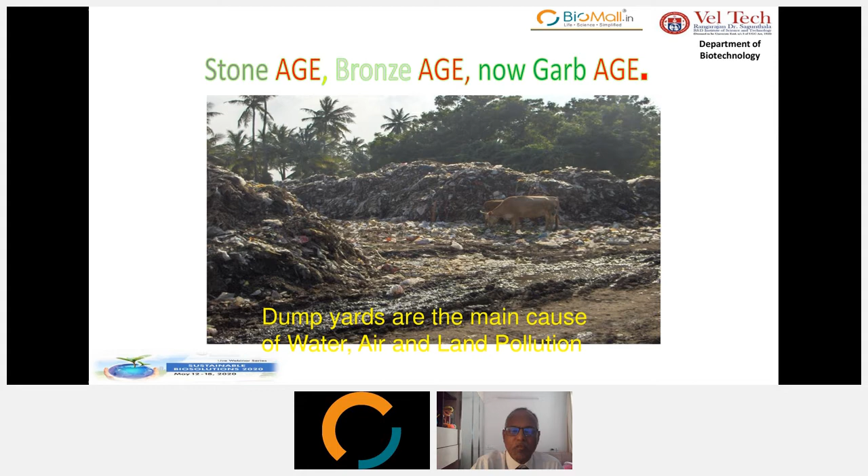We have gone through the Stone Age, Bronze Age, and now we are going through the garbage age. So dump yards are the main cause of water, air, and land pollution. These are waste generators, and the types of waste that are accumulated every day, and how that can be dealt with technologically, is what this slide is all about.

So we have biodegradable waste and non-biodegradable waste. Today's presentation is basically on how to handle the biodegradable waste, though there are solutions for non-biodegradable waste too. In biodegradable waste, we have the fast degradable ones - that's food waste and animal waste - which we are using biomethanation technology for.

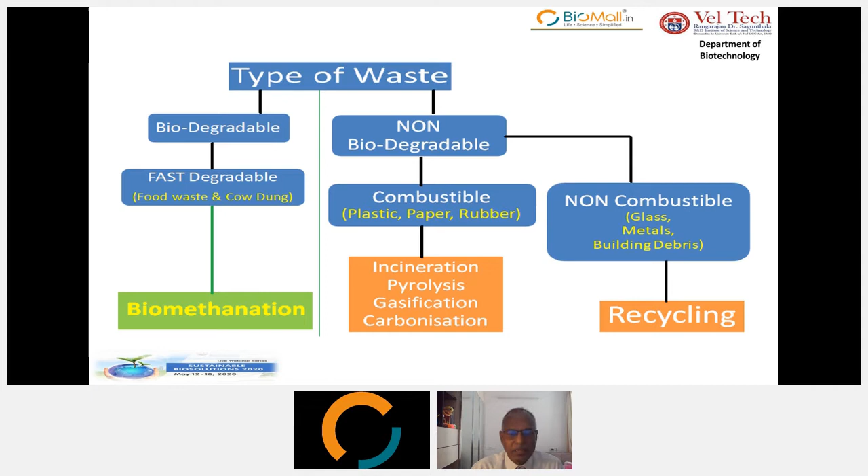So this is the solid waste generated per capita per day in any community, about 0.40 kgs. And sewage waste generated per capita is about 150 liters.

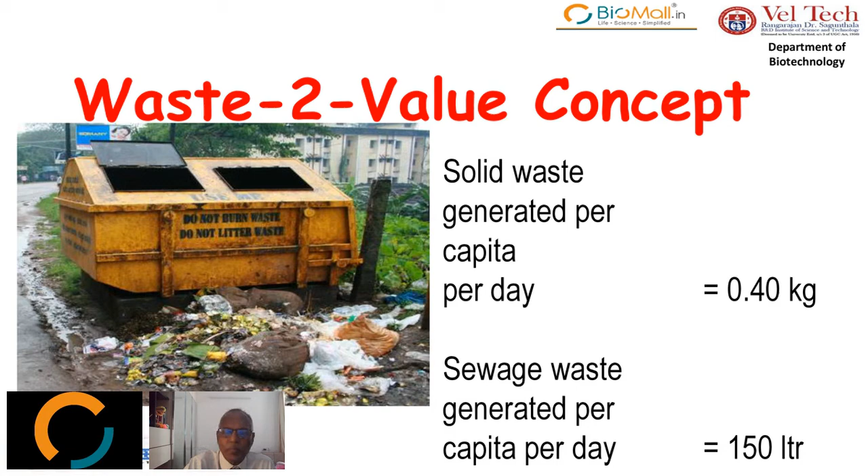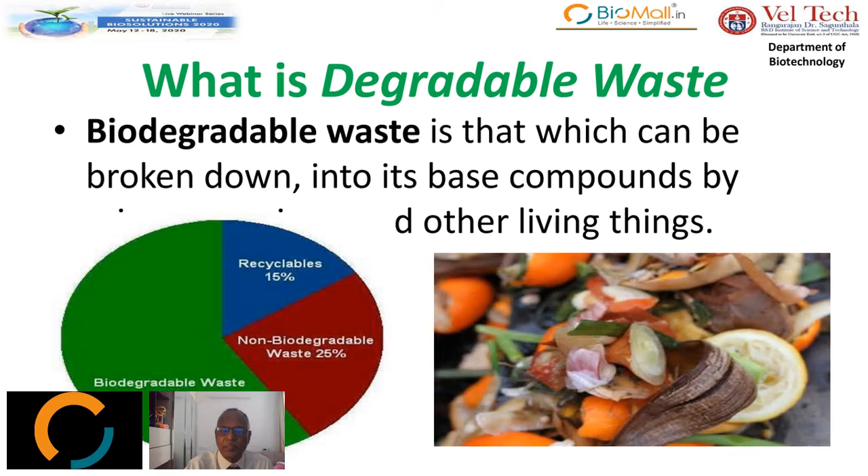Biodegradable waste is that which can be broken down into its base compound by other living things. We have explained this in brief, so now let's look at the details.

Food waste includes vegetable cut waste like peels, rotten leftovers of cooked food, and decayed foods.

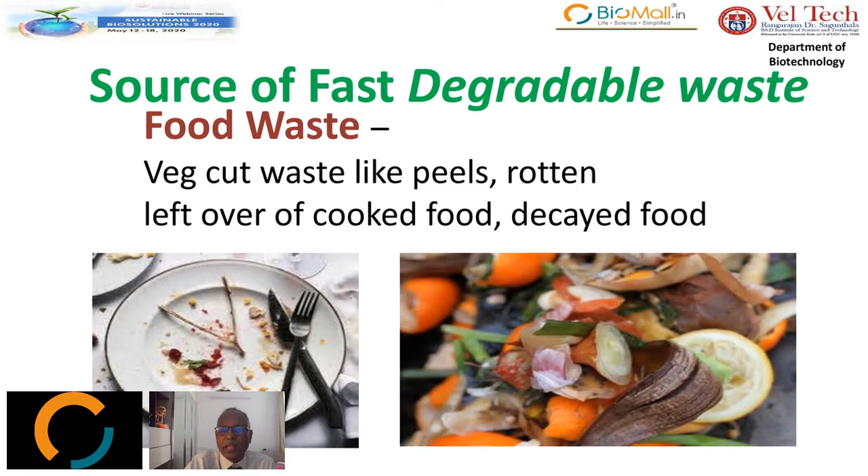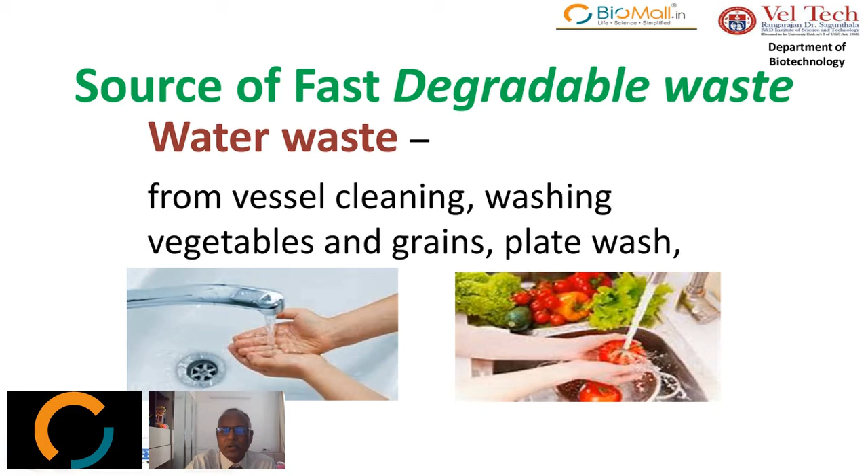Water waste comes from vessel cleaning, washing vegetables and grains, and plate wash. The only thing we have to ensure is that we don't use chemical detergents to clean up these things.

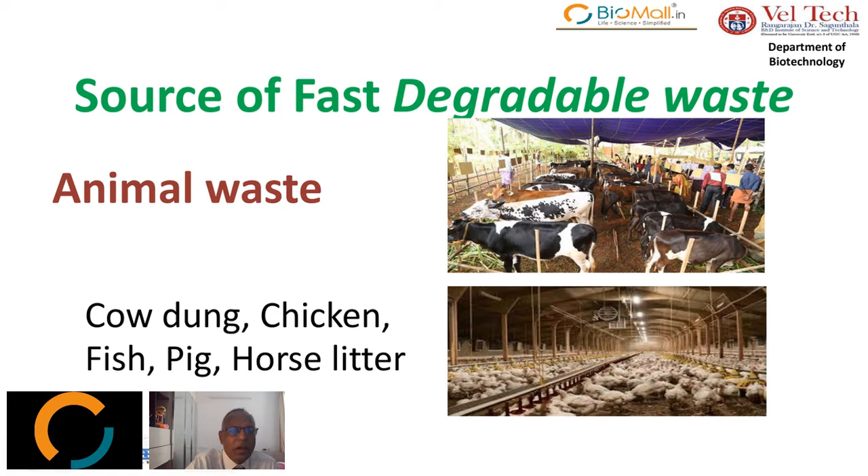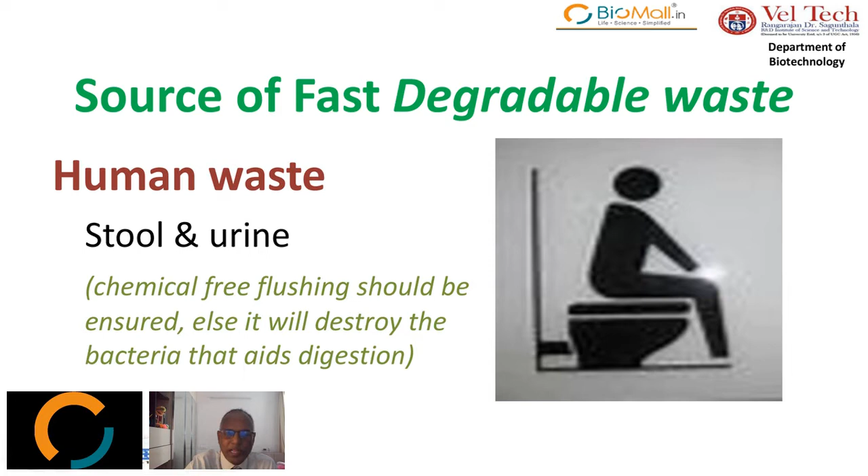And human waste, stool and urine. Chemical-free flushing should be ensured, else it will destroy the bacteria that aids in the digestion.

Source of slow degradable waste is from grass, garden trims, dry leaves, sawdust, rice husk, stalk, fronts, etc.

If you look at the crops that we produce in India or anywhere in the world, they can be classified as food products and commercial products. Food products are those we consume for daily living, and the commercial ones are used for our dressing and other things.

So for any of these things, the usable portion is only between 20 to 30%, and the balance is waste. What do we do with them? We either mulch them and put it back into the ground, which over time gets decayed and is also a cause of pollution, or we burn them up.

When we put them into the land, the gas that evolves is methane, and it is 20 times more dangerous than carbon dioxide.

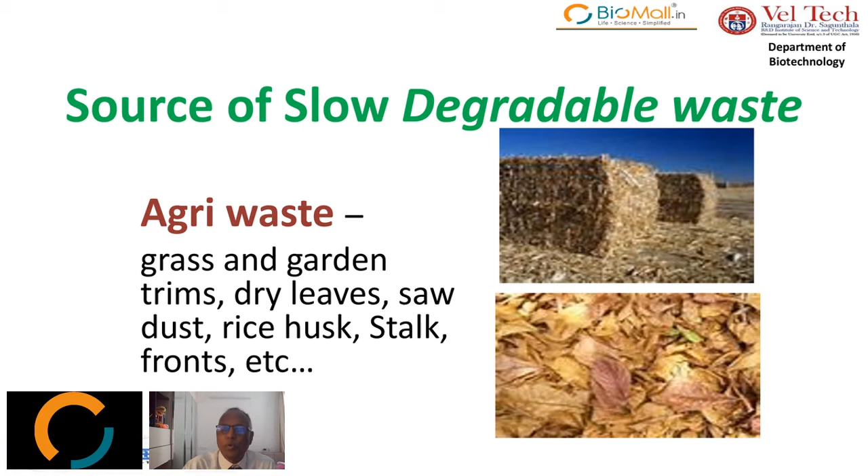Waste paper should be shredded and mixed with cow dung to be made into a homogeneous product.

Municipal solid waste is the most important thing which has got a solution. Only thing is we need a mindset and an attitudinal change to see that these are converted into a profitable gas. Today, people think this is a resource by itself and should be a revenue generating model. It is not so. Actually, there should be money spent on this to see that it is profitably used.

Most people talk of ROI in the waste management system. That's a misnomer. What we have to think about is only waste management and how to profitably use that in industries.

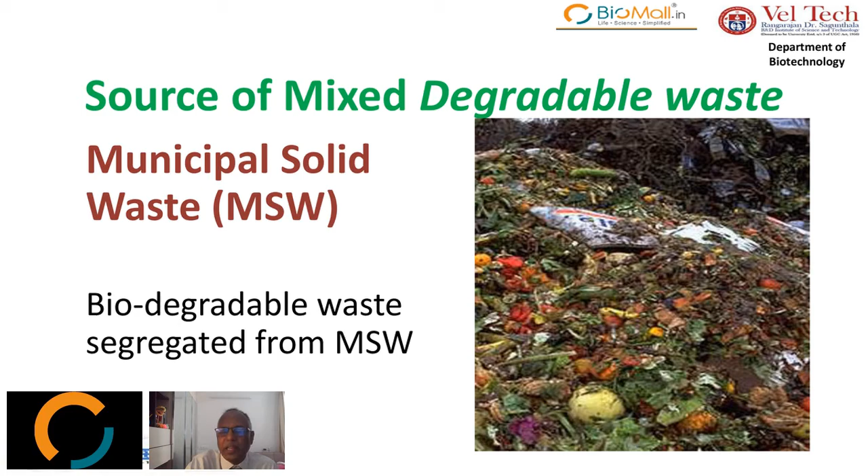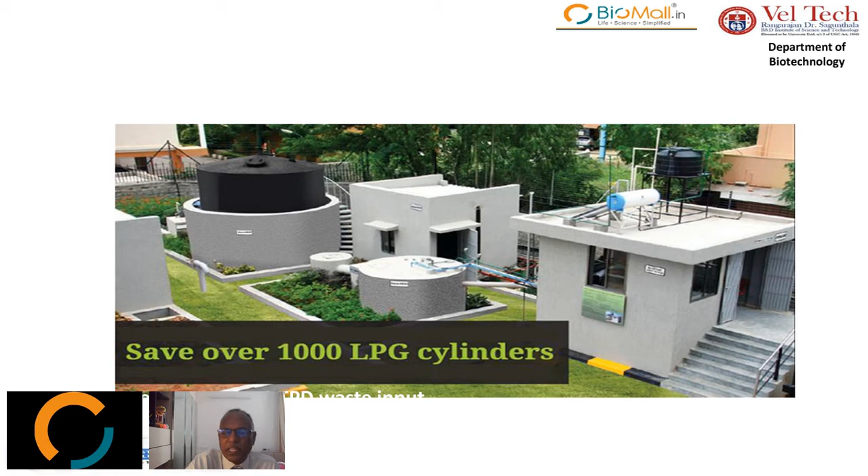This is one of our projects, a 1 ton project where 1 ton of biodegradable waste is handled, and this is saving around 1,000 LPG cylinders a year. We will give this detail in the coming slides.

This is the flow chart where the waste is put into a collection tank, then goes into a pre-digester where the product is homogenized and aerobic digestion takes place, and then it goes into an anaerobic digester. From there it is retained for about 20 to 25 days depending on the mix, and then what comes out is a gas which can be stored and used, and liquid manure which can also be converted into solid manure, which is very highly nutrient rich.

The gas can be used for either power or can be stored in cylinders, transported and used as fuel, or directly used as fuel. When we have to fill it in cylinders, we have to do further processing of cleaning up the gas.

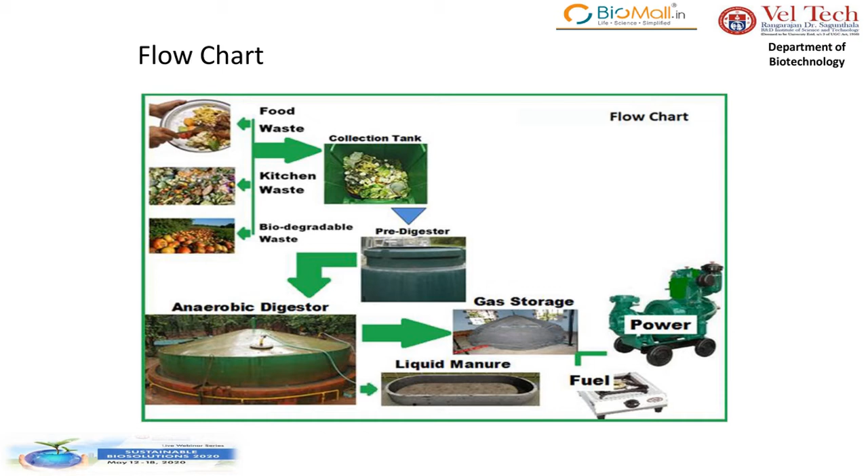This is the gas balloon which we normally use, and the sizes vary depending upon the size of the plant.

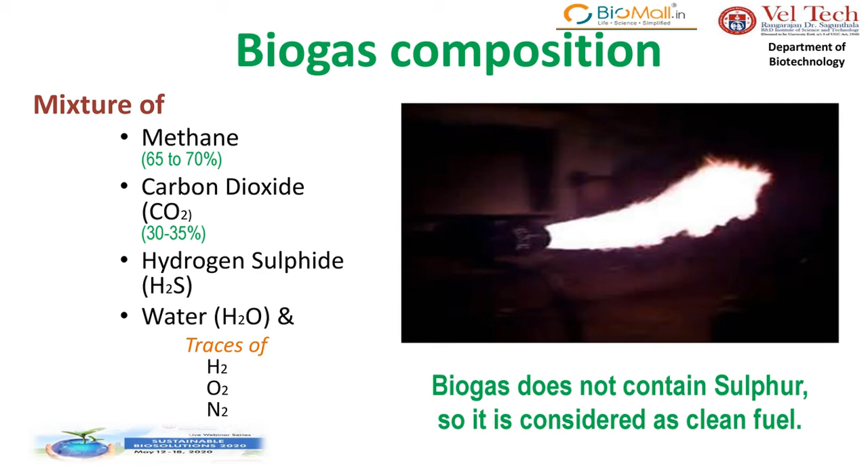So biogas composition is what we are seeing here. It's mainly methane, 65 to 70%, carbon dioxide 30 to 35%, hydrogen sulfide, and water and traces. Biogas does not contain sulfur, so it is considered a clean fuel.

The gas can be cleaned and filled in cylinders depending upon the use. It can be directly used up to 100 meters if the plant is set up within the industry. But in most places, when the volumes increase, it is not really possible to consume the entire thing.

So what we do is we fill it up in cylinders. There are different varieties of cylinders, but the standard ones are 12.5 kgs, and four cylinders become a cascade, which are easy to transport.

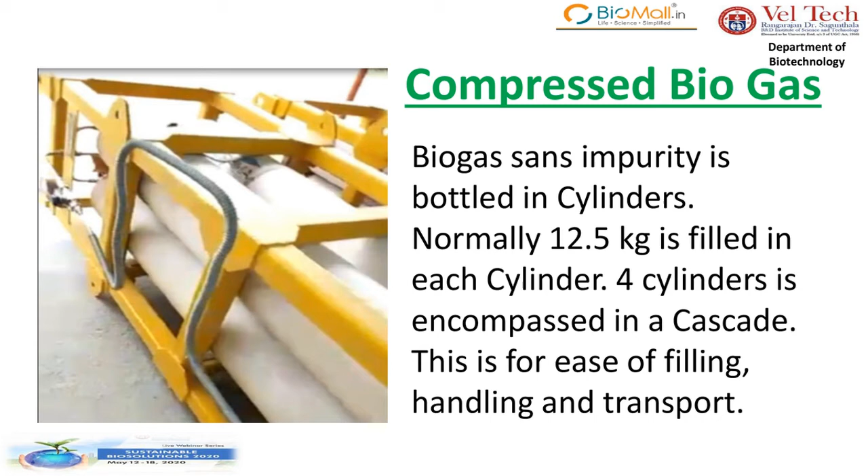So this gas can be put to different applications. When used at site, we use a burner—it's a lean gas, so we have bigger holes that are used in the burning, and it can be used in boilers also.

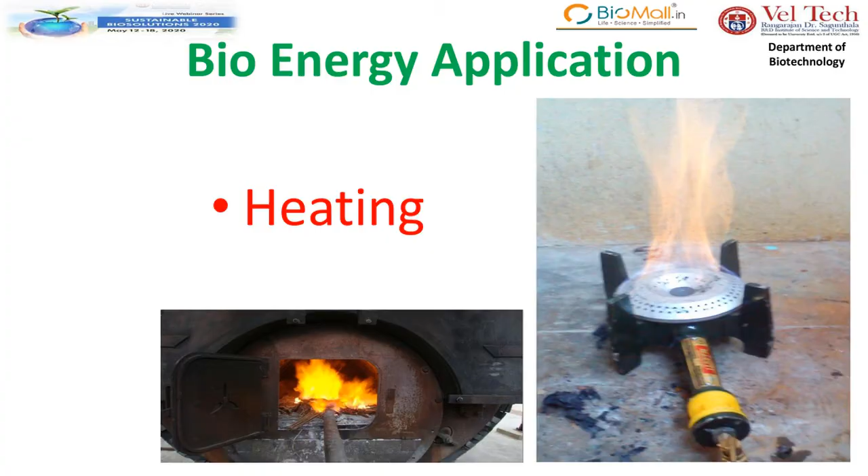It can be used for cooking. The different uses is what I'm explaining. It can be used for drying. We normally use this in tea industries and other drying applications, process drying.

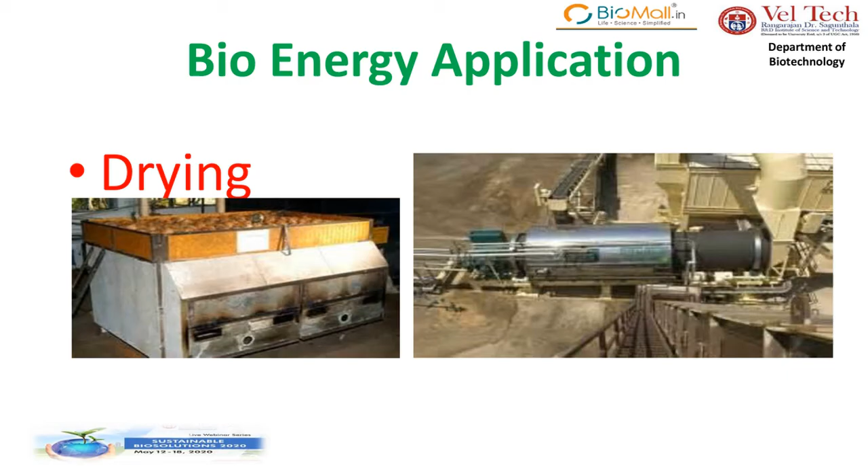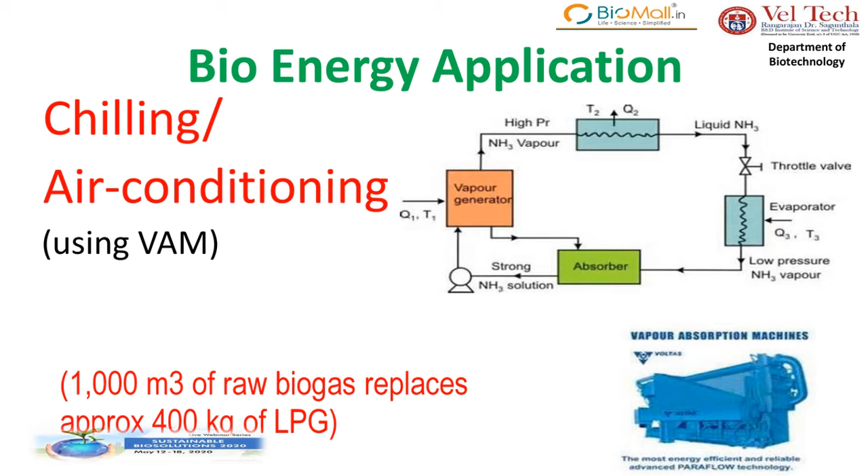In air conditioning, using a VAM, technologies have evolved where we have the latest vapor absorption machines also, where steam can be converted into chilling requirements.

Gas engines, clean and green power. 1,000 cubic meters of biogas can power a 125 kVA genset for 8 hours. So that's the type of waste to value proposition that we are talking about from waste.

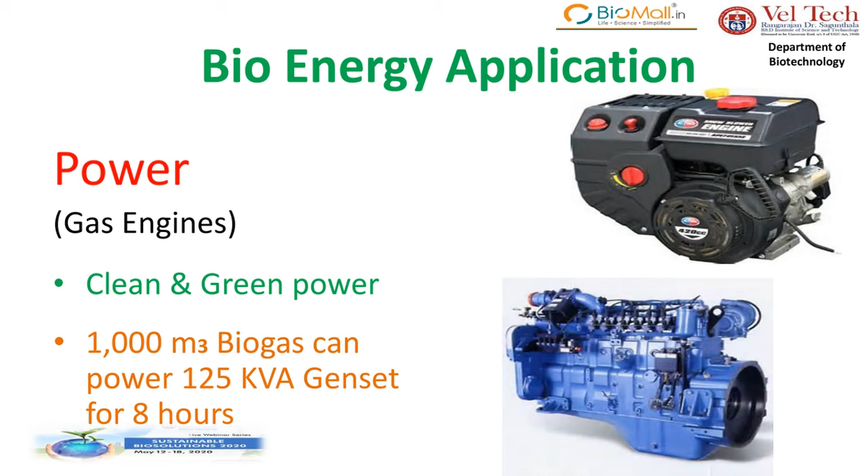This was used in World War II in automobiles for mobility also. So the application of this waste to energy is there in every industry, and every industry is also a waste generator. So liquid and solid waste are generated from these industries, animal industries, chemical industry, paper mills, sugar industry, abattoir, poultry farm, fish market, vegetable market, and gardens.

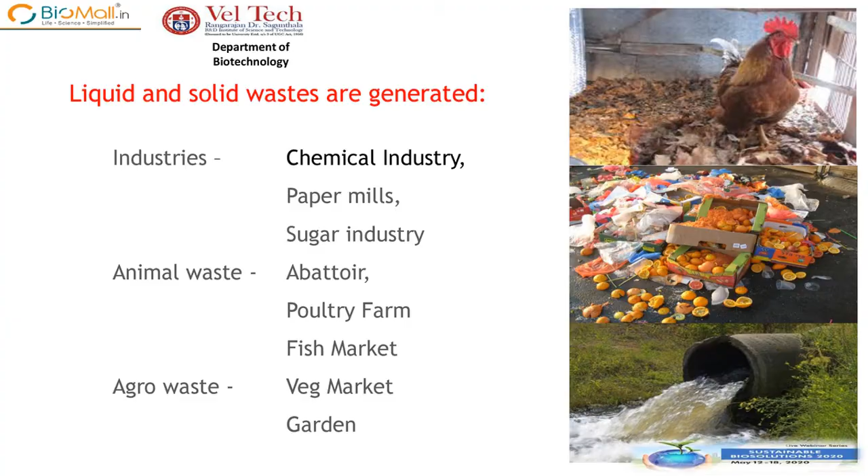A typical saving plan is shown here. I have taken a standard of about 1000 kg of waste processed per day, where we get an equivalent of 48 to 50 kgs, which at today's market price of 65 rupees per kg, there is a daily saving of 3,120 rupees, or an annual saving of 11 lakhs and 38,800 rupees.

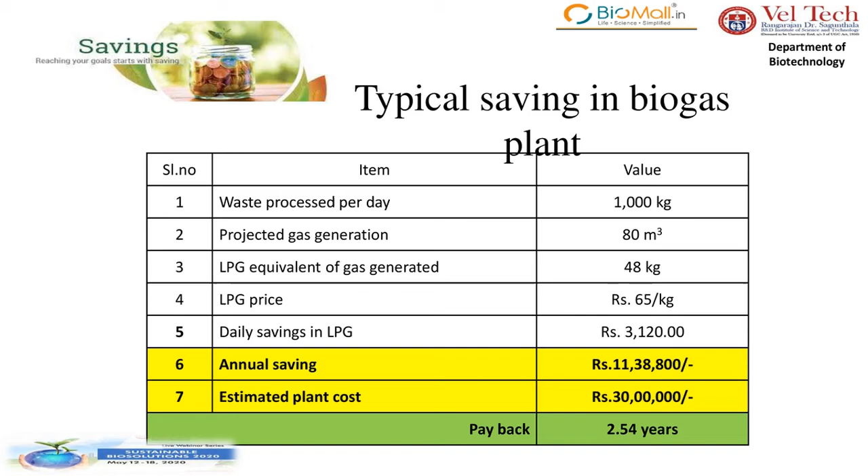Normally, the ROI for this type of renewable energy project is less than 3 years, which can be taken as a reasonable standard for investment, because loans are available, Swachh Bharat funds are there, and clean energy funds are available for industries. Or it can be a parallel industry where high net worth individuals can be requested to invest in the project in collaboration with the industries concerned, and the heat can be used for their process.

The solid byproduct, about 8 to 10% of the input, and liquid byproducts are nutrient rich and can be used for gardening.

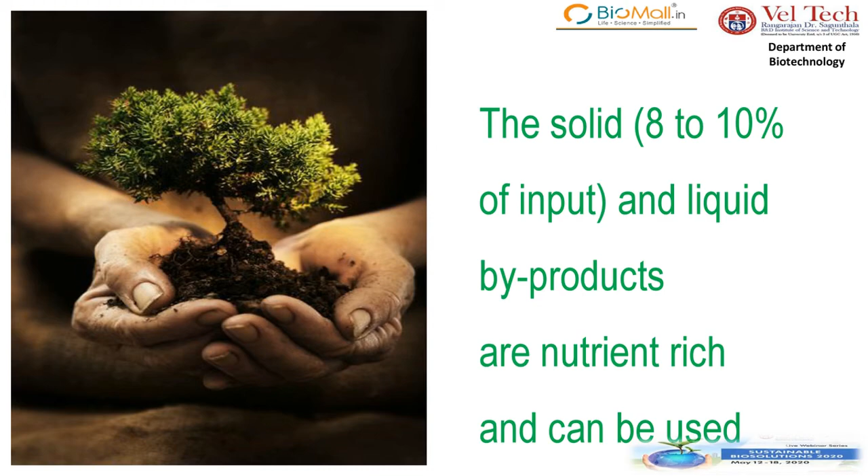We have standard packages available for these biogas plants, which I will show you in future slides, and custom engineered ones for large sizes, smaller ones in HDPE, where we can use it for hotel, canteen, cafeteria, and community kitchen.

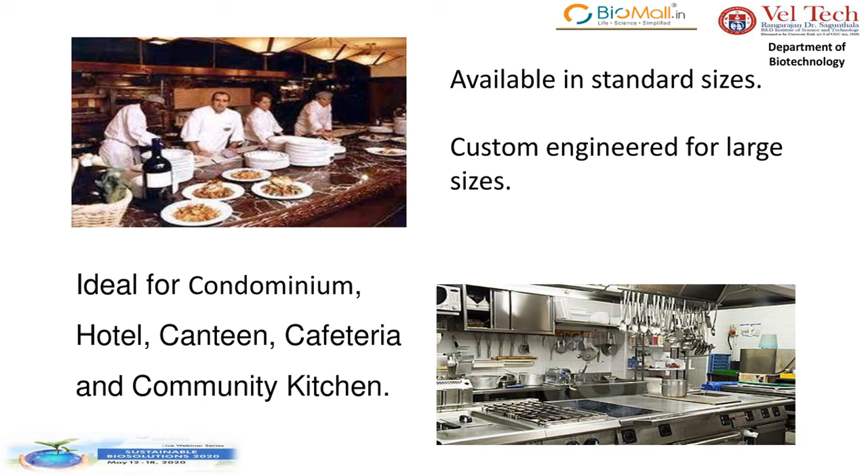These are some of the models that we have created. This is a 500 kg plant in TNPL kitchen, where it is used for their cooking purposes. SSM builders is a community of around 3,000 houses, where they are using this entire thing and taking it to their kitchen.

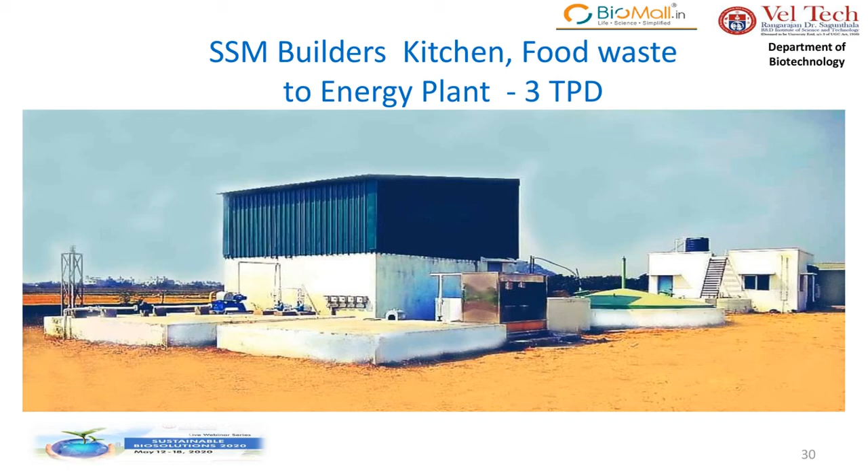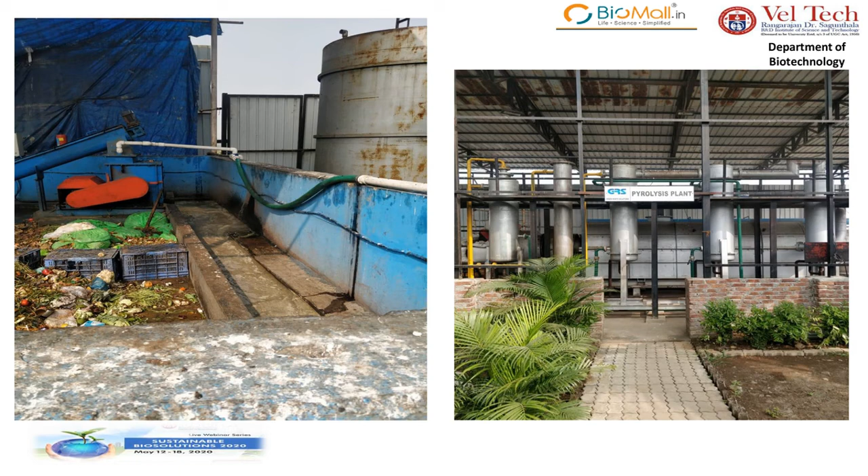Biogas plant set up in Kalyan for Godrej under the CSR project. So this is a view of the plant. I can show you a video of that plant later if time permits.

You can do whatever you want with this plug and play model. And this is very ideal for 100 kg to 1000 kgs. Even multiples of thousands can also be done, but cost-wise, it cannot be justified.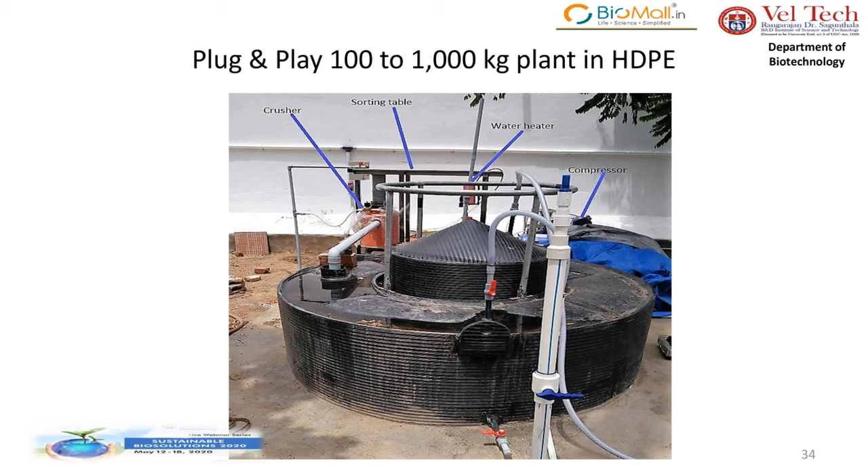So the technology we are employing is BARC technology, Nisarguna twin digester technology, and DRDO's advanced reed biotechnology, and Ecogia of Japan.

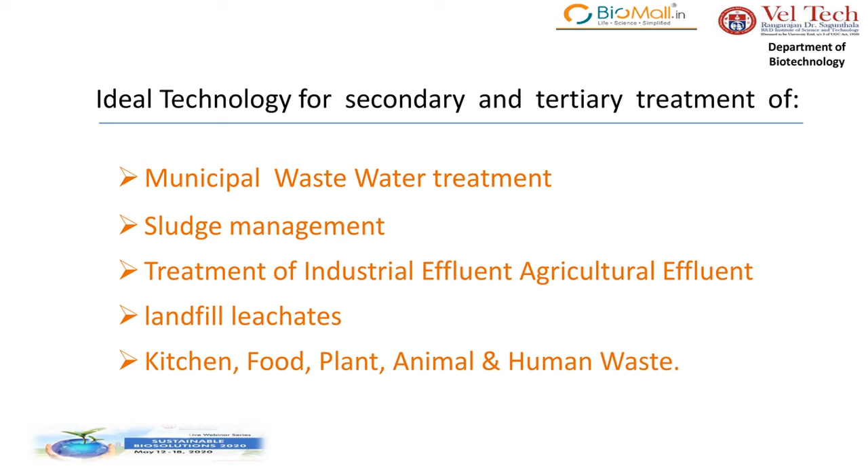So water treatment also is possible using this technology, municipal wastewater treatment. We can use that in the biogas plant also to improve the moisture content and homogenization of the waste, sludge management, treatment of industrial effluent, agricultural effluent, landfill leachate, kitchen, food, plant, animal, and human waste.

So DRDO's biodigester with reed bed technology is accepted for implementation on a national level by Indian Railways, Ministry of Drinking Water and Sanitation, FICCI, and Ganga Action Committee.

So these are the advantages which are coming with this: biodegradable waste processed at source without creating any environmental impact, zero waste concept, transporting and dumping eliminated, 100% foolproof system of waste handling.

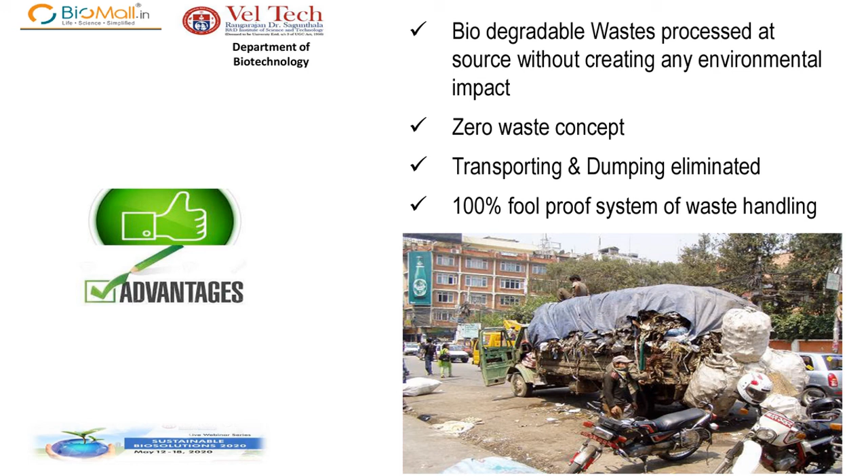The plant can be constructed underground without space wastage, environment friendly since the process does not generate any polluting liquids or gas, simple to operate, almost zero maintenance.

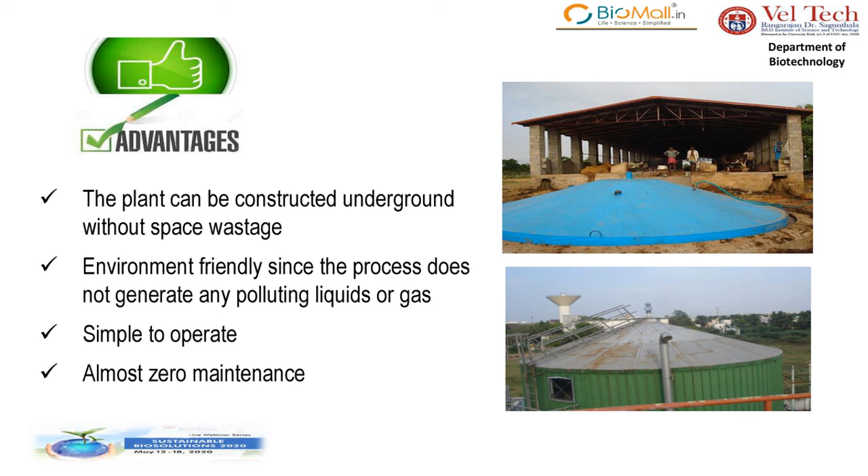So these are the advantages which come with this again: proven technology, practically sound, eco-friendly, maintenance-free, cost-effective, no electricity needed, minimum maintenance, self-sustainable, aesthetic appeal, no mosquitoes, no odor.

So these effects change with what is the input and what is the end requirement of the gas.

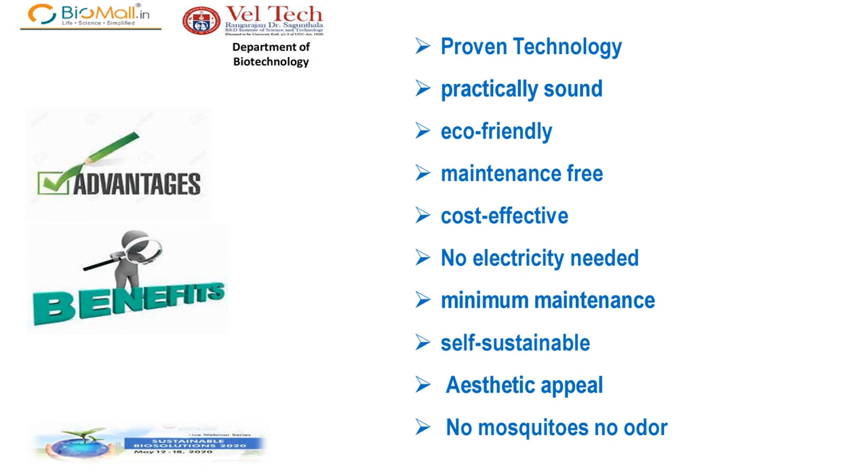So Acclaim, in association with NR Biotech Mumbai, is helping to set up integrated waste management projects in panchayats, municipalities and corporations under Swachh Bharat Abhiyan. And the fund is released directly to the municipalities through the National Institute of Rural Development and Panchayati Raj.

The advantage of this is the projects are without tender, which is the USP. So if you can work with the panchayats, corporation or municipalities, we can take this up as a model plant and execute it for them.

So take responsibility, join hands to mitigate the effects, and let's work to make this world a safer place to live in.